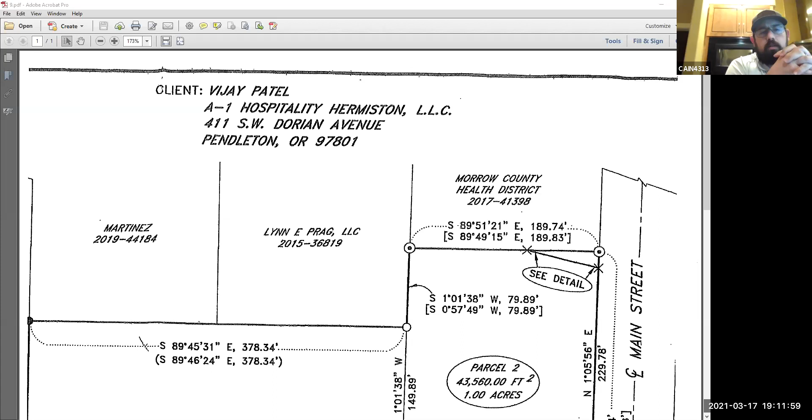I don't see any opponents or proponents here. Is there any other commissioners that feel a hearing's necessary? Because I'd rather just do a notification and let Barry make the decision as per ordinance and statute as a type 2 decision, unless anybody has any reservations about that.

I don't. No, that sounds reasonable. I'm good with that. Okay.

I guess just a couple questions I had, Barry - was 1 acre for that? I'm assuming it's a pretty good sized building. How many square feet's the building they're planning on putting in there? I can't remember.

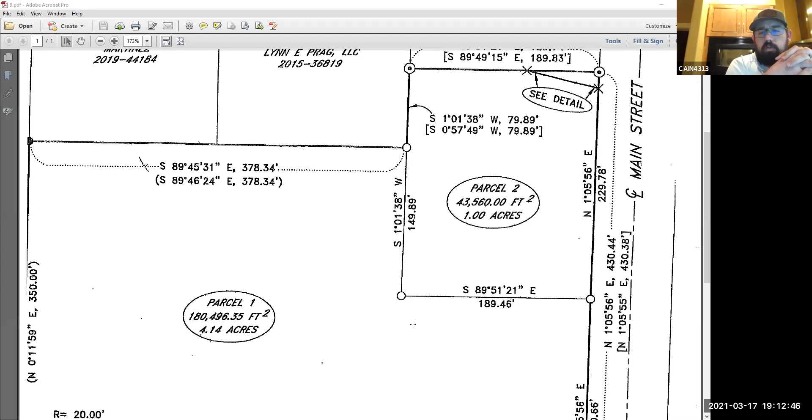The reason for my question is just to ensure there's adequate parking for a building like that. Seems like 1 acre would be pretty tight, but if it works, it works.

It's not going - they've actually got quite a few parking spots, on what they've shown me, and I don't have the square footage in front of me right now, but it's not very big.

Any other questions or can we move on? I think you've got support from the Planning Commission, Barry, to make the decision you need to make on that.

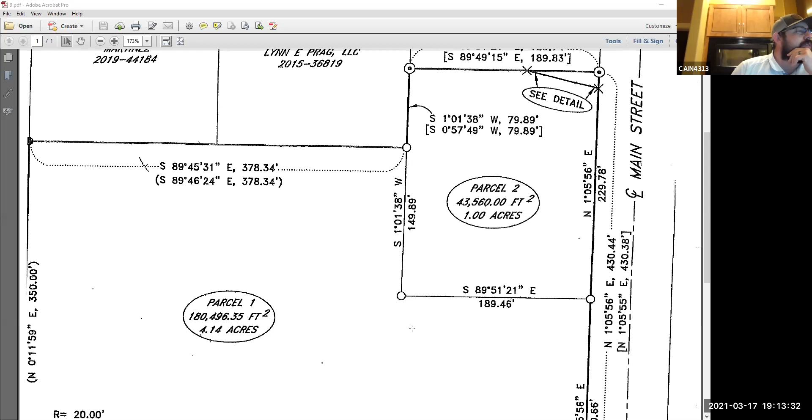Okay, Jackie, you can take that down then. And I will put together the notice of decision tomorrow. Thank you, Barry.

You ready to go to Chaparral Park? Yeah, so next item on the agenda, I'm scrolling through this - I don't have a paper copy in front of me. Looks like we've got a type 3 hearing for Chaparral Park. Let me write this down.

I'd like to commence a hearing for the Chaparral Park subdivision application. It looks like it's a subdivision for tax lot 100 on 4 North 25 East 7, section 17, of the 17-acre parcel - I guess it's lot 100, tax lot 28.

Looks like all of our commissioners have been through the public hearing process, so I don't need to summarize the rules. Do we have any abstentions? Any objections to jurisdiction? Doesn't sound like it. Barry, you want to take us through the staff report? Sure.

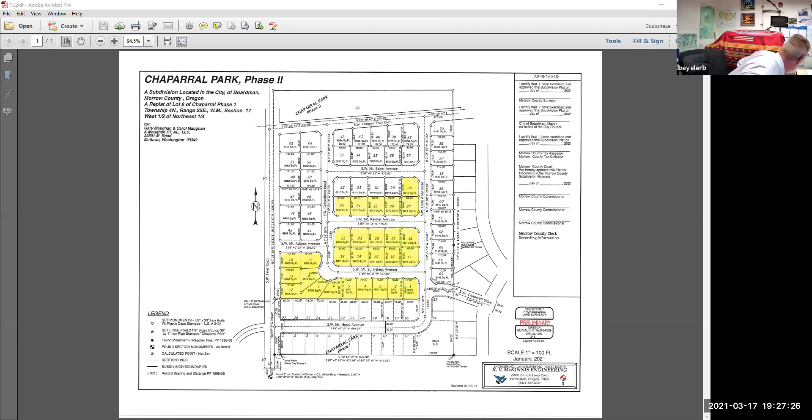If we notice tomorrow, we could have it as soon as the 14th, which would be the second Wednesday of next month. Okay, if we notice by the end of the week, it's hard to get it in the paper, if they wouldn't have it until Friday.

That's when they do their Saturday paper, so they may not have room. So Gary, the thought was the 14th. The intention was for all 66 lots as well, and if it needs to be continued till next month, he's fine with that. I guess we don't need to waste any more time. I think that's the best route to be in compliance with all notification requirements.

Do I need a motion to recess until... Barry, did you say I could set the next meeting for April 14th? Either April 14th or April 21st, which would be your regular meeting.

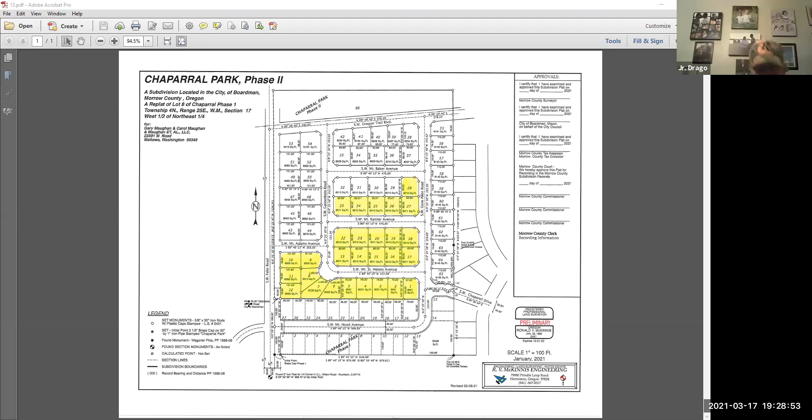It doesn't sound like there's a huge rush, so we could just go to the 21st unless there's a concern from Ron. No concern. So are we recessing or tabling this? I'll move to do whichever.

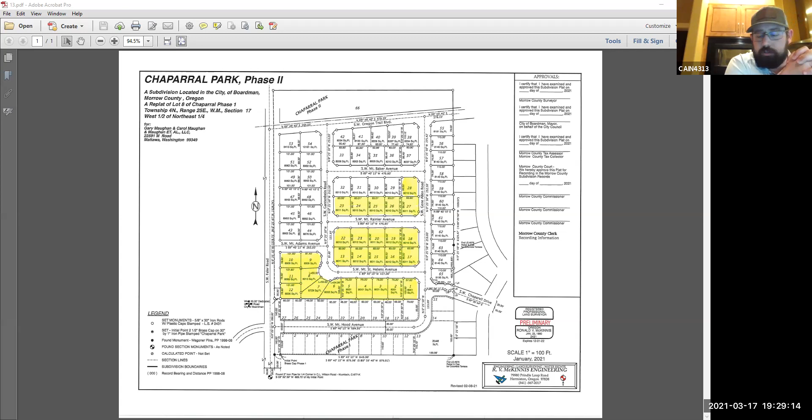Or we move to table? Yeah, so we need a motion and a second to recess this public hearing for Chaparral Park until our next regular scheduled planning commission meeting for April 21st. Okay, I'll recess for Chaparral Park Phase 2 until it's discussed at the April 21st meeting. All right, was that a motion?

Yeah, I'll second that motion. It was a poorly worded motion, but yes. So we have a motion by Ragna to recess the current hearing for the Chaparral Parks Phase 2 application until our next regular scheduled meeting at 7:00 PM on the 21st of April. That motion was seconded by Zach. All in favor, say aye. Aye. Aye. Aye. All opposed, same sign. Motion carries. Hearing is recessed.

Sorry, Ron. Thanks for coming, though. Hey, thanks, guys. I could have stayed out fishing a little longer, but that's okay. Oh, okay, see you next month. Sounds good.

So I'm going to move into the next application now, keep the show rolling. We have another type 3 hearing for the Tuscany Phase 3 project. Let me drop back down here. At this time, I'll go ahead and commence the public hearing. The purpose of the public hearing, as stated, is the application for Tuscany Phase 3, which is lot 33 and 34, a proposed 51 lots, single family detached residential units. This is a preliminary plat application.

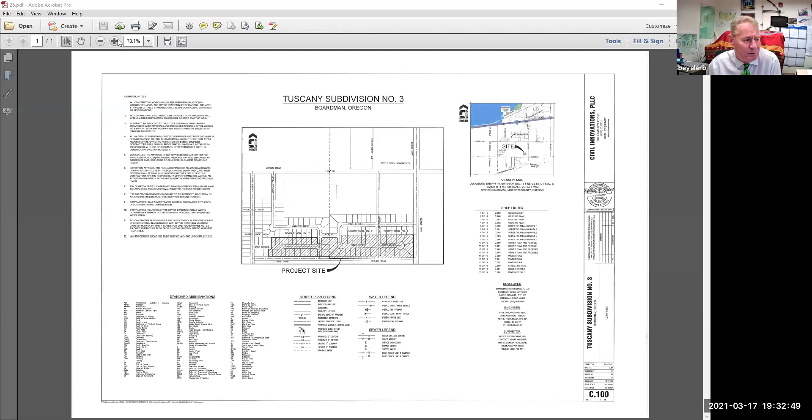3 maps are attached to show the tax lot locations and surrounding areas. Also attached are the 19 sheets of drawings reviewed, including rights of way, water, sewer, fire hydrants, sidewalk, and ADA ramp locations. I put the approval criteria in this one for council to look at. I'm actually going to have to put general approval. The city may approve with conditions or deny a preliminary plat based on the following approval criteria.

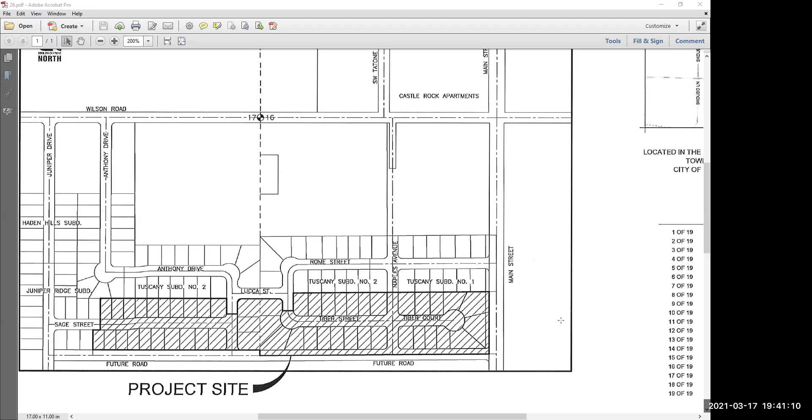The only last question I had was, I think I brought it up last meeting when we talked about this briefly. But the future road shown on the south side of the property—is that optimal for future planning needs?

If not, and that southern property someday turns into more housing at some future annexation and property acquisition date, is that future road removable? Because it looks to me like you'd want to put the backs of housing lots in the location of that future road, rather than the future road being down another set of lots in McCarty's property at some future time.

Does that make sense? I noticed that future road for part of this is included on the east side and not included on the west side. So it puzzled me. Actually, on the west side, through Juniper Ridge subdivision...

This would give us a 30-foot to be shared with McCarty's property, at the time McCarty's ever becomes lots, would be a 30-foot and 30-foot for a 60-foot right of way. And we'd have it from Main Street all the way to the property owned by the LDS church.

And if it goes through on that tangent, the property that sits on the corner of Paul Smith and West Wilson Road—did it go right along the edge of Desert Springs, Bay Vista, and that property, which is basically 3 lots right now that are in the county? They'd have to be annexed. But that'd give kind of a macro road grid that would go all the way through to Failer Road, or Paul Smith Road, I mean.

Okay. That's in our connectivity map.

Just looking at it from a 1,000-foot level, it seems like you could almost fit another row of houses before you built that next road. It'd be more efficient to where the road would have frontage on both sides rather than just one side. Yeah, but I can't plan the counties. Right at the edge of that future road is where the county jurisdiction ends. It's city as it gets further to the west.

Okay, proponent's case. Is there anybody on that'd like to say a few words for the development? I thought maybe we'd have somebody on here from the engineers and Meridian, maybe not. I do know they are for it because they're kind of pressuring to get it done.

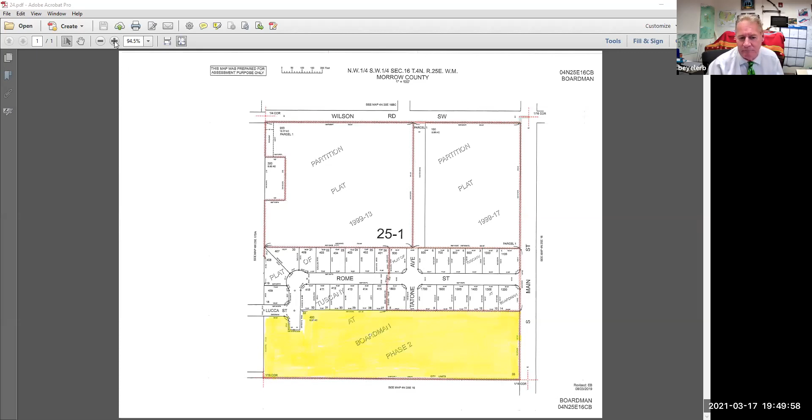Okay, so in their plans on the cover — okay. So what you're saying is the future road is already part of an existing partition on the west side of that section line, on the Juniper Ridge subdivision. Okay, they were dedicating in phases. They got to phase 3 and that's as far as they went. Okay, alright, no more questions for me.

Any opponents? You know, actually, I think we've had a question in the chat. Well, I'm gonna wait until — well, I guess we could do it now.

What, if any, is planned for parks in that area? So I guess this is back to the green area discussion, Barry. They are on Lucca Street. There is a pathway that goes through. You'll be able to get by sidewalk to that pathway that goes right directly to the schools. And we've got the green space at the schools.

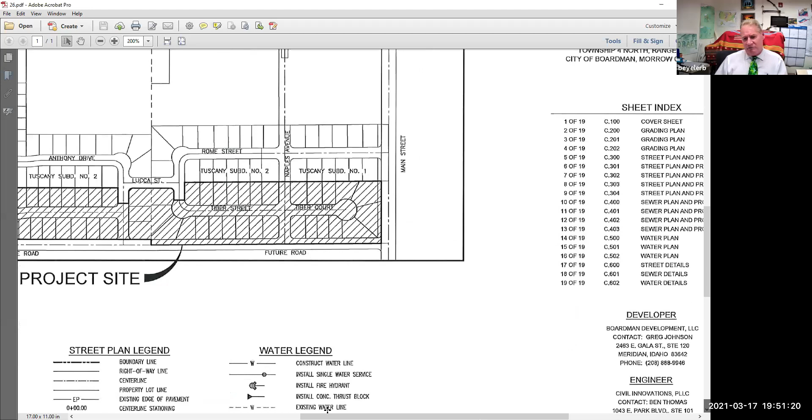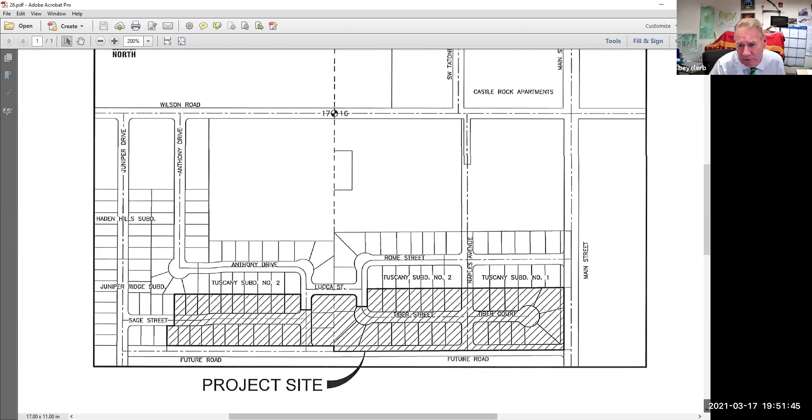Is that property truly public, or are they gonna have a locked gate at night and on weekends? They've been using it as public property for the youth soccer leagues and things like that for quite some time. I haven't had a chat with the director for the school district, but they generally don't lock it up. And they've got the play equipment and stuff.

What it says is there are 2 options, and I threw it out because this is discussion we're gonna need to take into account. It says that you either build the park, or you come up with a payment that allows for a park fund to be built. On this one, I did the math on it. It would be about 33,000 square feet on 51 lots at the rate. So how much is that worth? That's about 3/4 of an acre. It'd take 4 lots out of their subdivision.

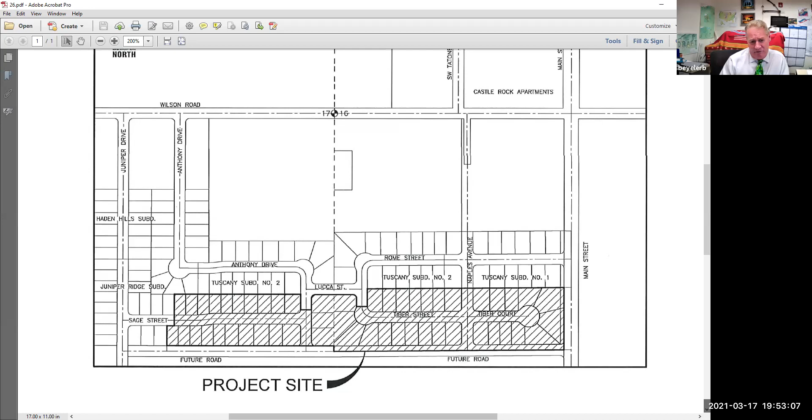At today's prices, I talked with a couple of realtors on this. An 8,000 square foot lot with all the utilities to service is about $55,000 per lot. And you usually get around 4 lots, so this is going to be about 3/4 of an acre that you take away.

Is it okay if I ask a question right now? A question for Barry, or a question for the rest of the commissioners? Barry, I have a question.

So if there is no park planned or included in these plans, and they're assuming that because there are schools there and they don't seem to be locked up, that they don't need to put parks in. I'm just thinking with an increase in traffic and population increasing, could the school district ever start locking their property, and that not make it available for park use? So before passing this, would we have to see plans for a park in this? I'm just confused—if you were to condition it that they have to put in a park, they'd have to redraw and figure out where they were going to put that park.

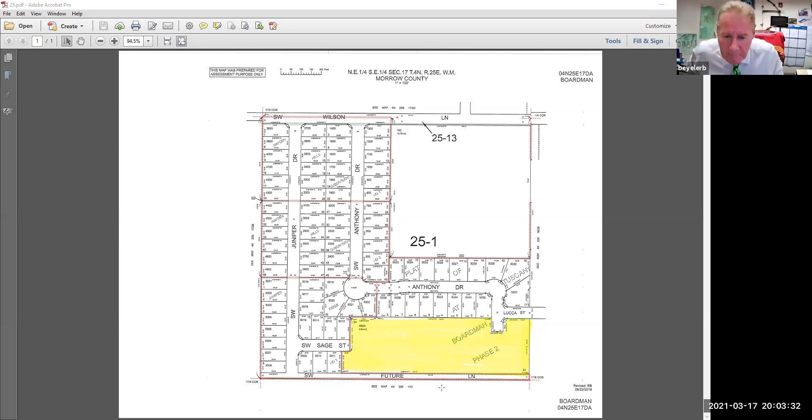Well, personally, I'd fully support the implementation of requiring a green space, whether or not it's a full 33,000 square feet, or if we can size accordingly or something of that nature, I'd fully support it. I don't know what everybody else's opinion is on it.

We tried doing the same thing over in Sunridge Terrace—just taking a lot and making a pocket park. And it didn't work out there.